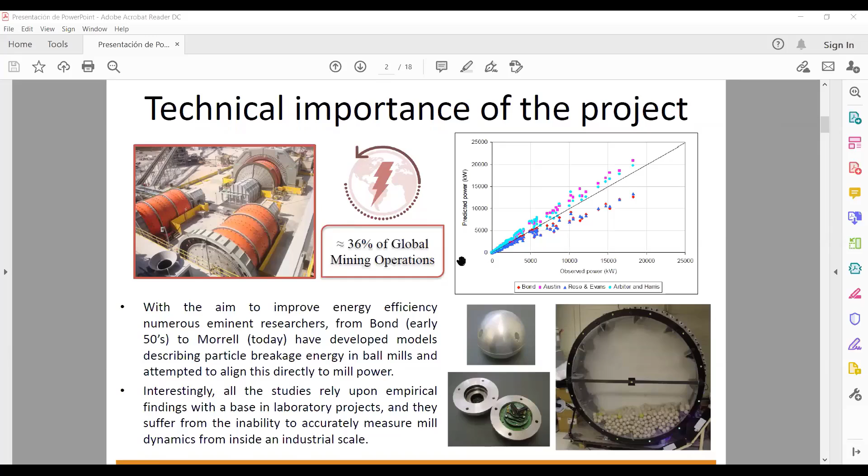Slowly, it's slow to move. Okay.

So people have tried to measure inside the SAG mill before. So work was done at the University of Utah, Rajamani, and one of the departments of energy in the United States. And then another attempt was made to measure inside a mill by Peter Radziszewski and Suda Martins, McGill University, and they actually built a ball sensor out of aluminium and plastic, and they tried to make that sensor system work, and they proposed that this sensor that could be put inside a ball would measure for a very short time, but wouldn't really represent the dynamics of an industrial SAG mill.

So what we did in this project was we've successfully secured in-ball measurement from within an operating SAG mill. And we've been running a project now at an operating mill in Western Australia, where I am. I'm at the mill today. That's where I'm having the call from. And we are analysing data from inside the ball inside the mill as it moves around to try and understand and improve mill optimization modeling, and separately to try and improve on-site decision making. So just move to our next slide.

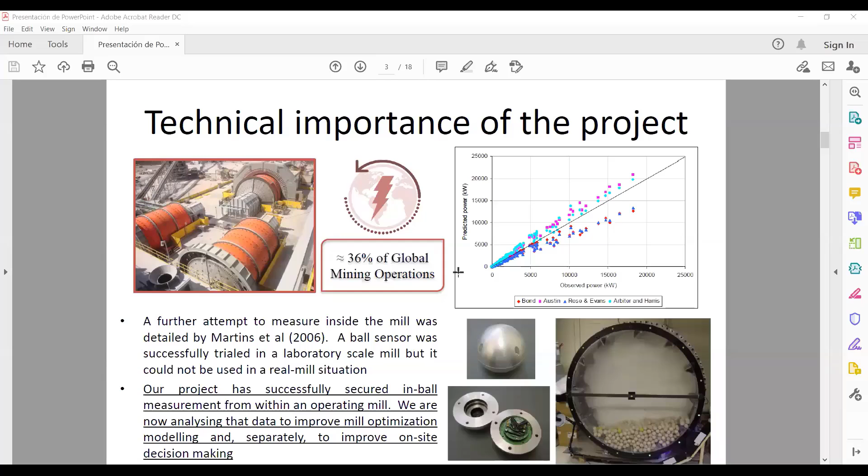So the best practice for understanding and measuring inside the mill has certainly been assisted by technology and the development of discrete element method modeling. And these are simulations based on mathematical modeling and energy movements within the mill, but they tend to be highly constrained in that they're situational, they assume steady state, they suffer from difficulty in validation. We use DEM within Molycop, and we use it to get insight into the right questions to ask, and we combine that with our own mill optimization toolkit, etc.

So we're not opposed to DEM at all, but it gives us really great insight into understanding the constraints of DEM and what it's used for and how it's used, and the standard practice in real life for mill modeling and comminution is a paradigm really of throughput, trying to connect power draw and throughput as a coverall approach in a really, really complex system.

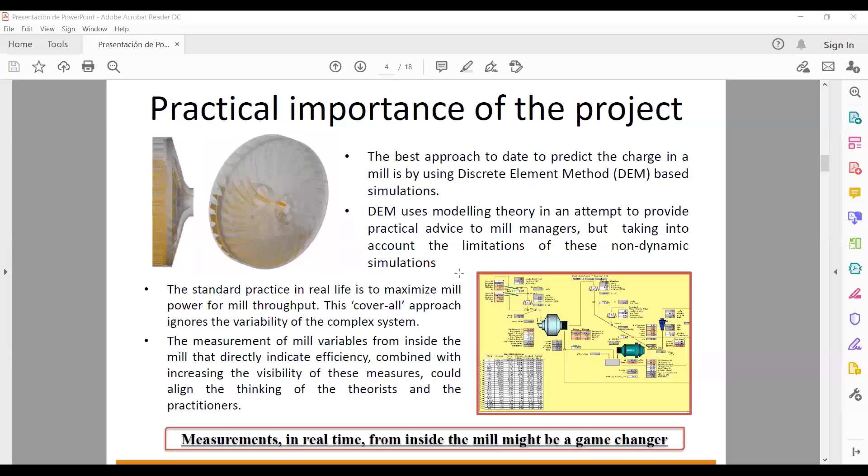And so that brings us to this slide, really, the importance of the project. So we heard about these social and fiscal challenges, really, really well articulated by Neville Plint, significantly better articulated than I'm going to do. And then we've got a host of technology, automation, data analytics, big data, the virtual mine, remote operating centers.

And so we're about harnessing that digital transformation, bringing together this technology with this ambition focused on a particular project, the SAG mill, to measure from inside the mill and deliver real results. A sensor system that improves theoretical modeling and provides results that can be seen in real time can facilitate skills and decision-making of plant teams, industry associations, research bodies, and this possibly means significantly more for less effort.

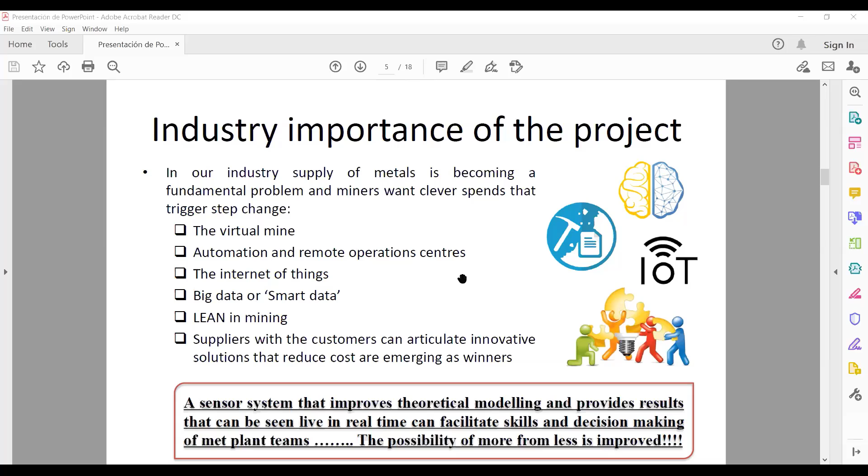We've developed the technology. We don't need to insert sensors inside every ball. As a matter of fact, in the mill that we're currently working on, which has over 2,000 balls, we're getting pretty good results from 8 to 12 balls. So it's not every ball that needs a sensor, it's just enough.

And then the sensor from within the ball sends a signal. The signal can work with the tags that we fasten to the liner bolts, or it can work independently. It's captured by antennas. One of those antennas is positioned within the feed chute of the SAG mill. And then that signal, it's a digital signal, and it's sent to a data receiver where there's some edge server processing.

It's cleaned, it's sent to the cloud, we're using an OSI Pi historian, and then it's made into variables and projected onto a slave screen for the operators at plants to see. And then we also use that data and do a couple of data analytics projects.

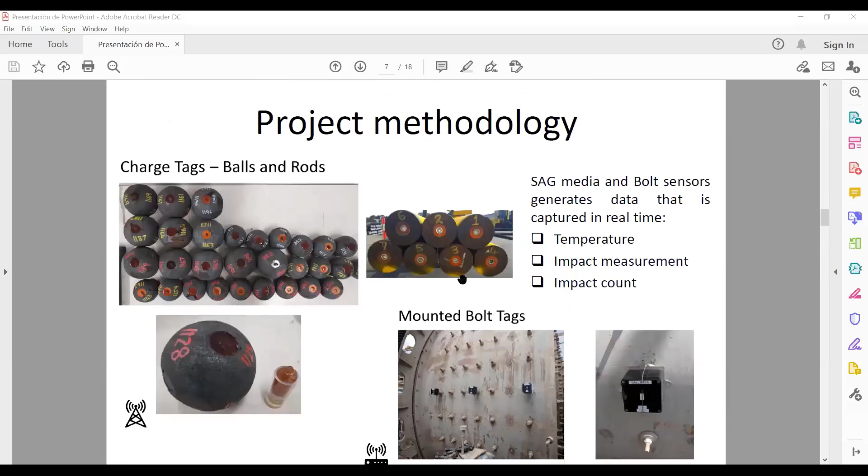This gives you insight into, so here are the balls and here are the tags inside the balls. So this is a sensor. It's about 76 millimeters long, and then this is in rods. So we ran a project in a rod mill for 12 months as well.

And then these are the bolt sensors, so they fix onto the existing bolts. You don't need a different bolt, so that's great for all SAG mills anywhere. So we literally fasten them on, screw them on. We have a bracket to attach them. And so these give you the feed, middle, and discharge, and we see those results.

So we can see the balls inside the mill and the impact quanta and the impact count of balls within the mill. And we can also see from outside the mill the motion, the charge motion between the feed, the middle, and the discharge end of those balls when they're moving, and that infers the movement of the charge.

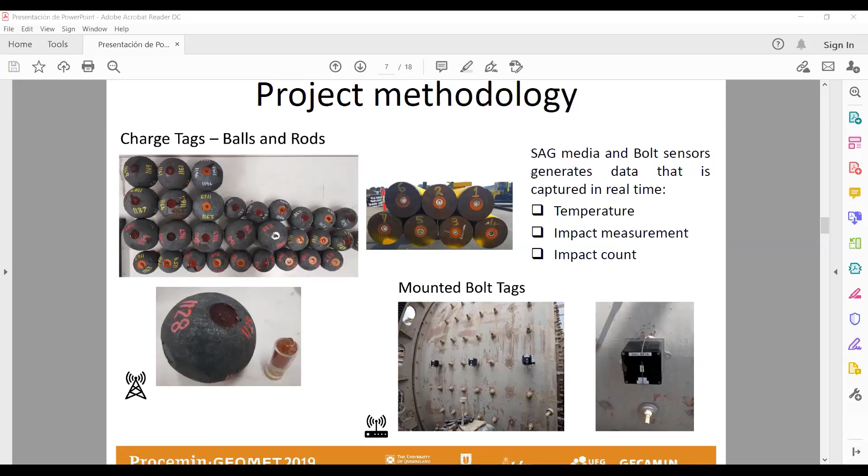These are some of the very early results that we've got. So these are results from a 125 millimeter ball within a mill and a 94 millimeter ball within a mill, and we have a reference tag, and then we got temperature, and then we have the number of strikes and the size and the scale of those strikes, and we've broken that into three sort of strike quantas.

And what we can see is, as the energy inside the mill picks up, we see a change in the incline of this count impact graph, and so that's a great telltale sign of the increased energy within the mill.

And we've done a lot of work around temperature, and what we found was the temperature really closely maps the slurry temperature, and the slurry temperature really closely maps the outside temperature or the ambient temperature. So we were hoping to get a measure of energy or energy transfer, or see something from that temperature measurement inside the ball that connects with energy dissipation.

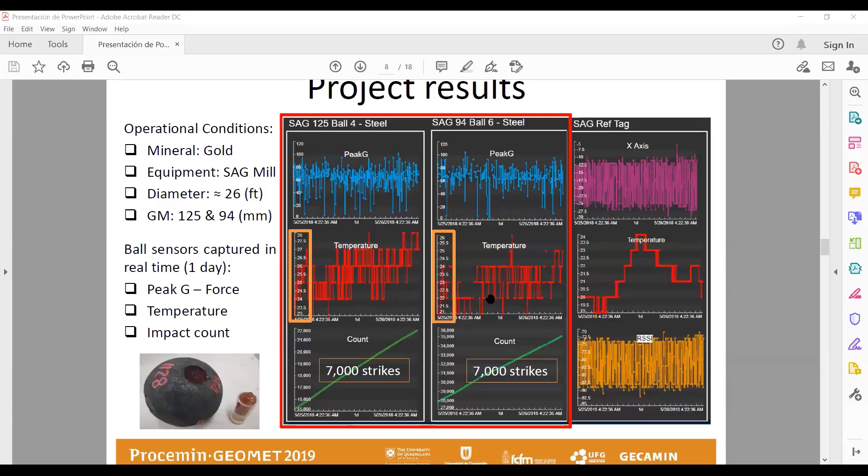But what we got was a very unique temperature measurement or thermometer inside the mill, which you can get from the slurry temperature anyway. So we have moved on from using temperature and focused on these other variables now.

And these are just showing you some of the early results and some of the work we've done working on the inferences and trying to connect the operation of the mill, what we're seeing in the mill, what we call a mill event in our language. So a change in the performance of the mill, or a change in the operating state of the mill, and then connecting that to the data that we're seeing from within the mill.

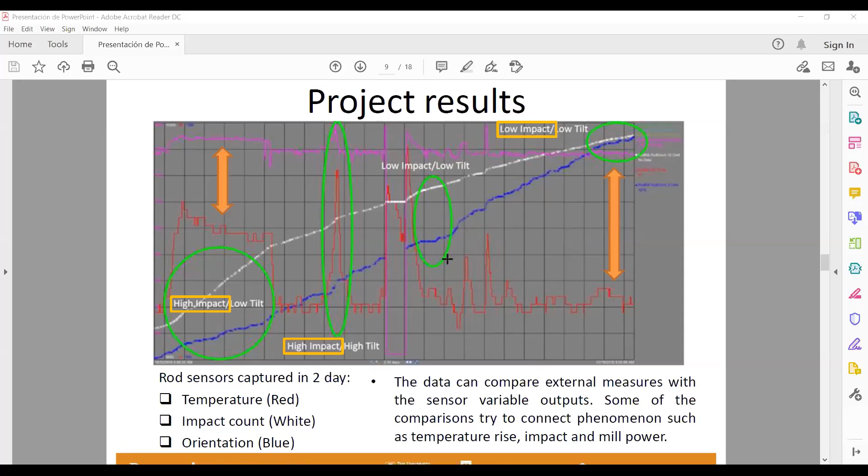And this is rod mill data, and we were measuring impact and tilt in this case. So for a rod, tilt was the difference between the 180 degrees, and we were finding rods were moving more than 1 degree from horizontal, which takes a lot of energy, so that was interesting and early days.

Overall, our ambition is to understand all of those mill events, all of that variability in the mill, and then connect that to root causes, and then try and remove two things: either try and remove the variability or what's causing that through operator behavior, so things the operator can do, or if we can't remove it completely, then let's reduce the variability cycle time.

So what we mean there is, let's say you're processing and you hit a period of different competence ore, or a different ore that you were not expecting, you'll see the characteristics of your mill change. And that cycle time of change might be hours. It does not change for a short time, it changes for hours.

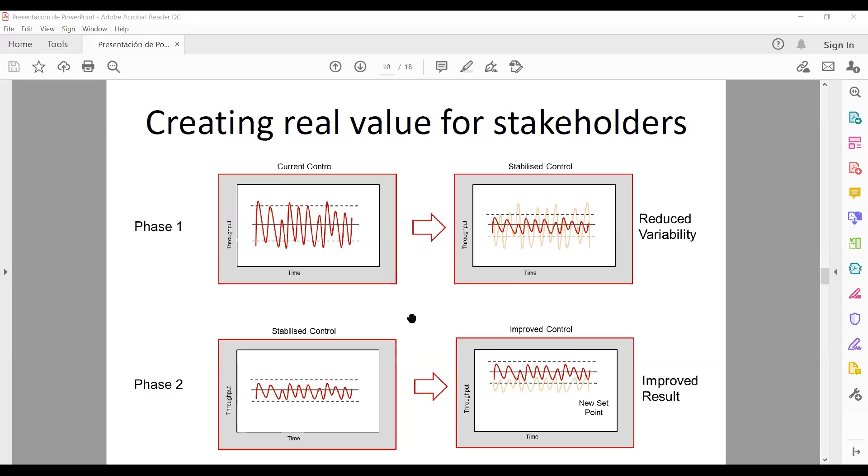So if we can measure that, and if we can measure the energy inside the mill with what we're doing, connect that to these mill events, and give the operator something that he can change, then we can reduce that variability cycle time or reduce the mill event completely. So we're working on that. Of course, what are the consequences of that?

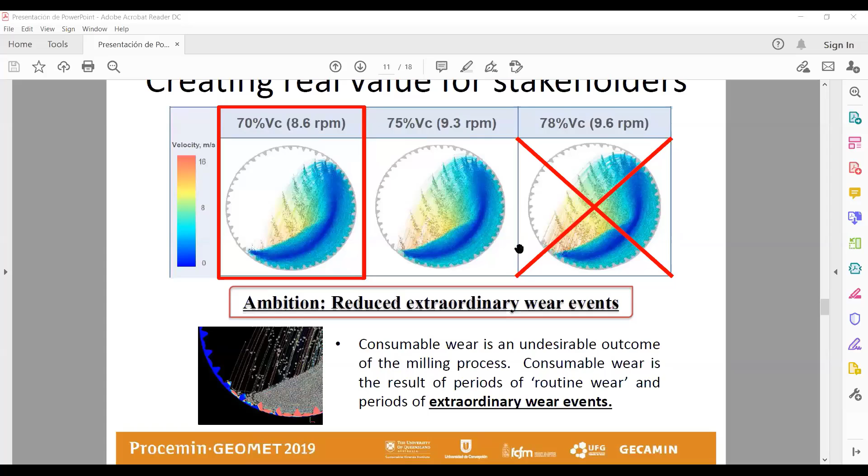And what we don't want is this cataracting behavior, throwing it onto the lifter bars, onto the liners, missing the working toe, and delivering you these extraordinary wear events. And measuring inside the mill gives you great insight. We found great insight from the sensor systems measuring inside the mill in these cases.

And then, of course, if you can do this, reduce that variability, reduce the cycle time of the variability over a longer period, and measure that, then you create real value for stakeholders. You'll get improved throughput, an increase in energy efficiency, improved operator decision making, and you'll reduce these extraordinary wear events.

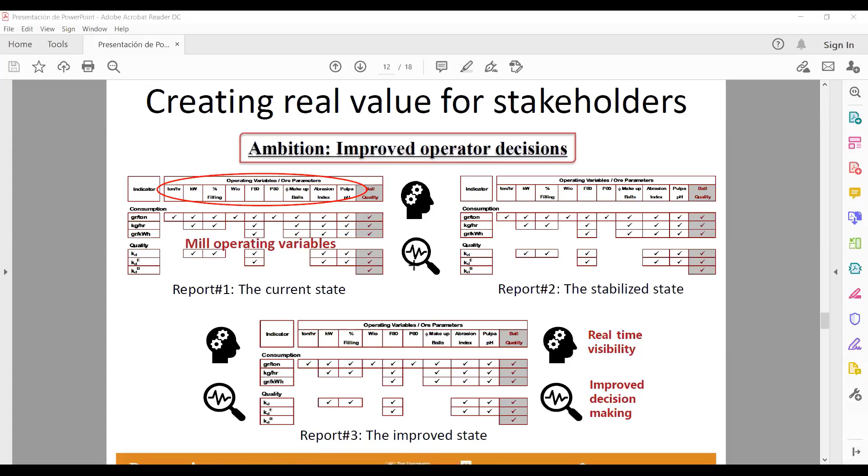So you're getting top line revenue and bottom line reduction in costs, which our ambitions are, really significant for the mining teams. So your fiscal responsibility and your social responsibility targets are being met by delivering these ambitions. So these were the conclusions at that time.

The commercialization of the project, or the proof of concept, or the attempt to commercialize the project, has proven that a sensor system can deliver real-time measurement from inside an operating mill. We have 2 mills in Australia operating with SAG balls and tag bolts measuring inside the mill. We'll deploy one in South America at the end of the year. That'll be our 3rd mill.

The system is incredibly robust. It's reliable. The sensors read the data. The sensors last long enough to give us meaningful, robust and reliable data. Our initial results show us that we can connect mill events with the SCADA data.

So we also draw in the SCADA data and throw that onto the dashboard, and we can connect very well what we're seeing from the measurements inside the mill with mill events and changes in operator practices, like we talked about the ore blends, oxide runs, changing the crusher, setting the crusher gaps. These sorts of things we can actually connect to energy changes within the mill.

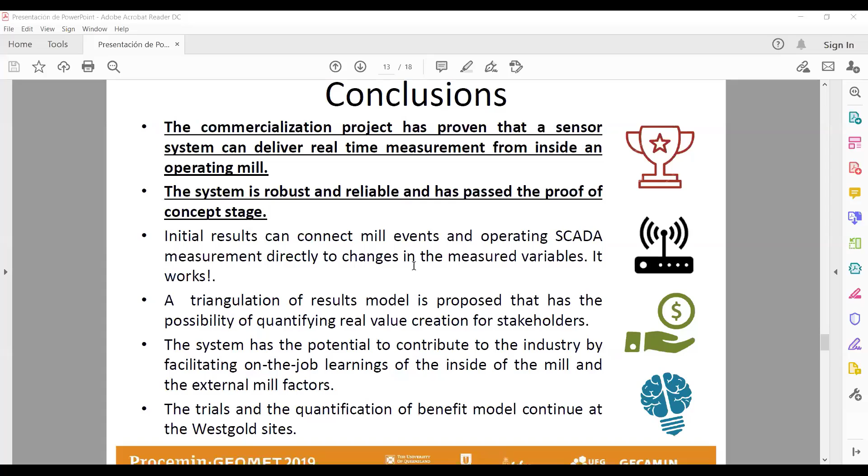And then the trials and the quantification of a benefit model continue at the Westgold sites, exactly where I am today. I'll just move on to the next work.

We are quite optimistic about being able to have the trajectory of a ball measured from inside the mill in a graphic on a screen. We think that's really realistic, and we think that will significantly help the DEM modelers and the empirical modelers in their quest to validate their models.

Algorithm development, supporting AI and machine learning. So we have two streams of data analytics. One stream is in operating states. What we've done is identify operating states of less variability and operating states of high variability. And then we've looked at the moderating variables that affect these, and we've been successfully able to build a model with machine learning algorithms that can show these two operating states and then pick a transition point, or what's called a change point, between these two mathematically modeled operating states.

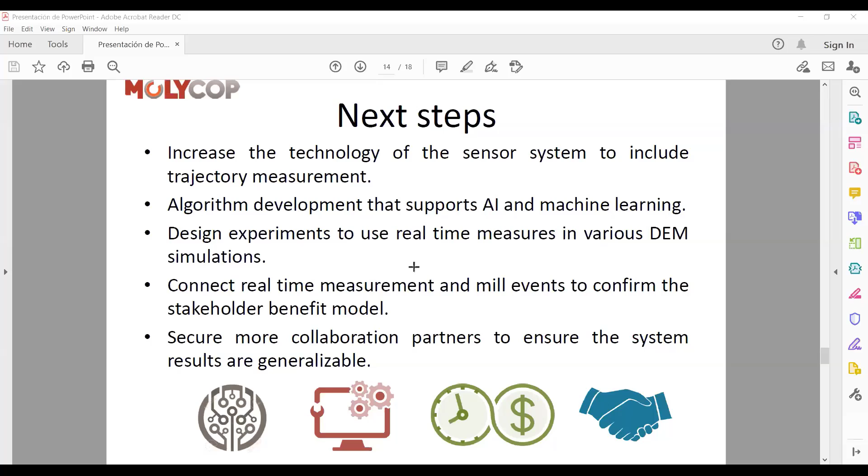And we're absolutely interested in more mining teams and associations to work with, to progress, to realise the step change that we think might be possible for the industry from measuring inside the mill. And so that's our concept. That's where we are. We've certainly done in the year a lot of work that gives us a lot of confidence in realising our ambitions. I think that's where we're up to, Domenica.

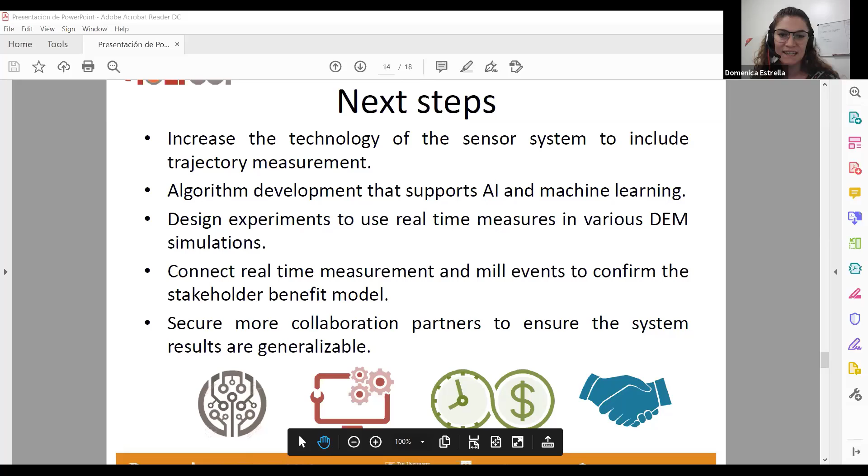The first question is from Munson. How would you validate the measurement of the instrumented balls in industrial scale? Yep. So the way that we're validating is that we deliver what's called a base case. So we go and take a lot of the data and just develop a base case of how that SAG mill is operating right now.

And we look at the variability, so the mill events that are causing variability during the base case. And then we deploy the balls within the mill. First we establish that data can be captured and realised and thrown on the screen. And then we look at that data and identify and connect it to mill events, and then make attempts to reduce the variability, firstly of those mill events or the variability cycle.

And then we run another circuit analysis using the tools and we look at the differences in throughput between one, the base case, and two, the case when you were using the data and making different decisions. And we see the changes in things like throughput, wear, and energy efficiency. And then we have to go through this really tough journey of assigning that to the actual data that was measured and the decisions that people were making. And that's where we're up to.